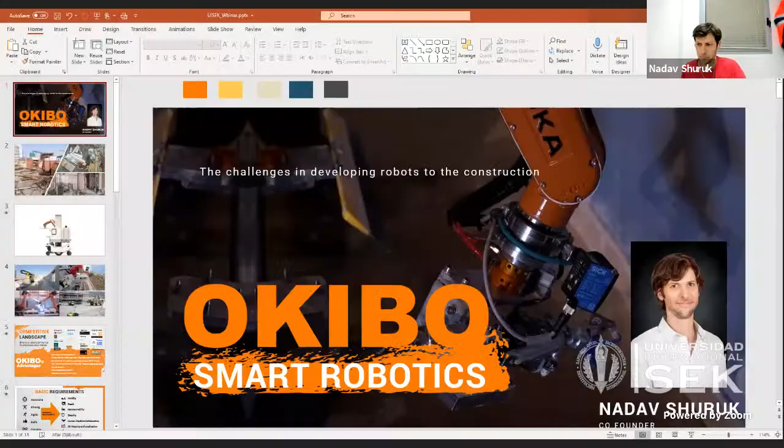Hi, I'll be talking today about some challenges of bringing robots, especially autonomous robots, to the construction industry. We founded OKIBO three years ago with very limited knowledge about this industry. We had some knowledge about robotics and autonomous robots, but combining those two industries together, we found out it's a big challenge, and I will be happy to share with you some of those challenges within the next 20 or 30 minutes that we have in this talk.

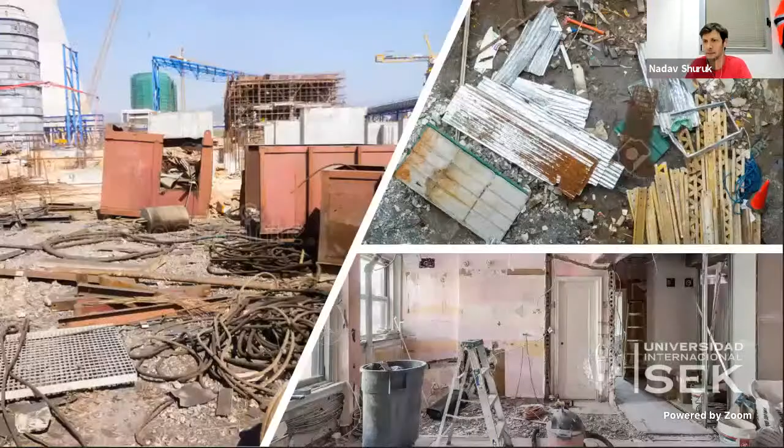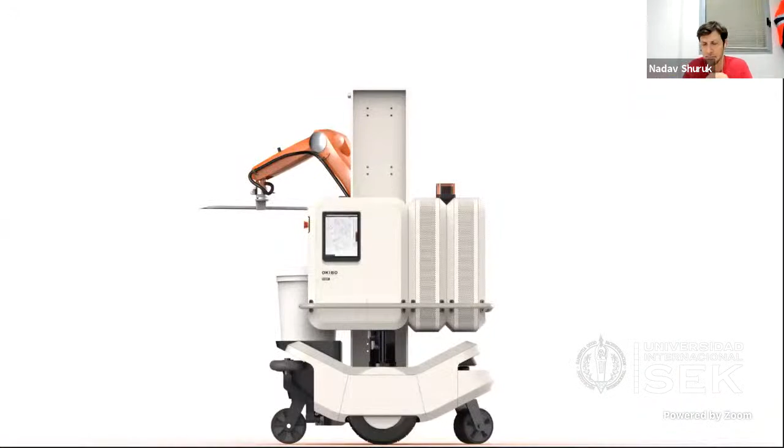I'm not sure how construction sites look like in Ecuador. I know how they look in Israel, something like this. You see a lot of mess and debris and all sorts of elements hanging around the site. In Europe, as far as I know, and in other areas, the site looks a little bit better, but overall it's not the nicest place to be. It has a lot of stuff all around. The question is, how do you bring very sophisticated equipment combined with computer vision, cameras, and all sorts of computers on top of it, something like this? How do you take this...

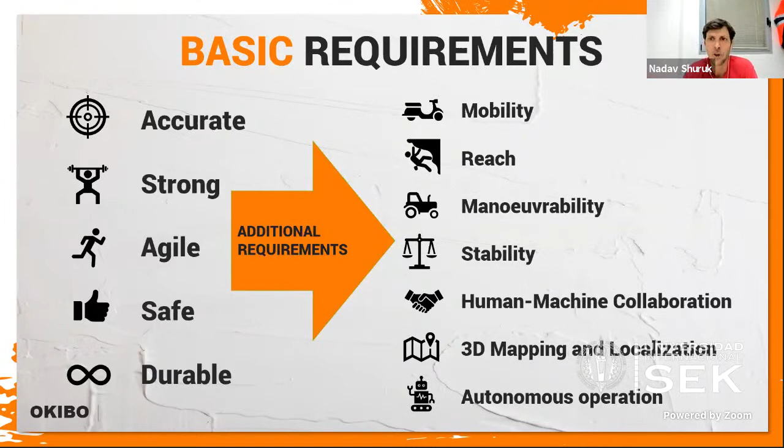So all in all, there are a lot of requirements, and some of them contradict one another. For example, if you need a robot to move around the site but also want it to reach large areas, you need the robot to be big. But if it's a big robot, you cannot transfer it around the site. So all those requirements, as I mentioned, can be very contradictory.

So, some applications that our company is dealing with—I'll try to combine what I presented earlier with what we're trying to do. OKIBO is developing a robot for applying wet materials as part of the finishing process. What we're doing basically is taking paint, plaster materials, primers—all materials used to cover internal walls when finishing construction—and applying them autonomously with the robot.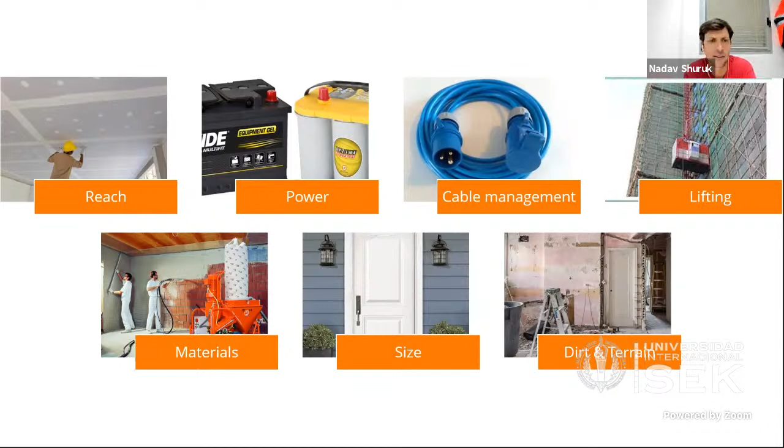And the last challenge that we're facing on a daily basis is of course the site itself, which is very dirty, and you have to have very high ground clearance of wheels and stronger motors and gears that will allow you to cross all sorts of obstacles, whether it's small slopes or stairs and so on.

This is something that has to be addressed well while designing and developing the solution. So what we did in OKIBO is we developed all sorts of technologies that we apply in our robot, and we divide it into three major pillars. The first pillar is the robotic platform itself, which needs to have all sorts of requirements.

Here you can see in this slide our fourth model called the EG number 5. It's a model that we ran last year in some job site testing. You can see on the top end there is the robotic manipulator standing on top of a linear axis. This axis lifts the manipulator, and this is what gives us the ability to move from floor to ceiling.

All the movement is synchronized, so we can keep constant velocity and constant distance from the wall, and in one motion actually cover a specific area in the wall.

As you can see here, this is the pump, and in this case, this is paint, the blue pump. The pump is mounted on top of the robot, and the material feeding is being done with buckets. So we take the bucket, we mix the paint, sometimes you need to dilute it a little bit with water and mix it, and then we just mount it on top of the robot into the pump, and we have the ability to spray the robot and to spray the wall.

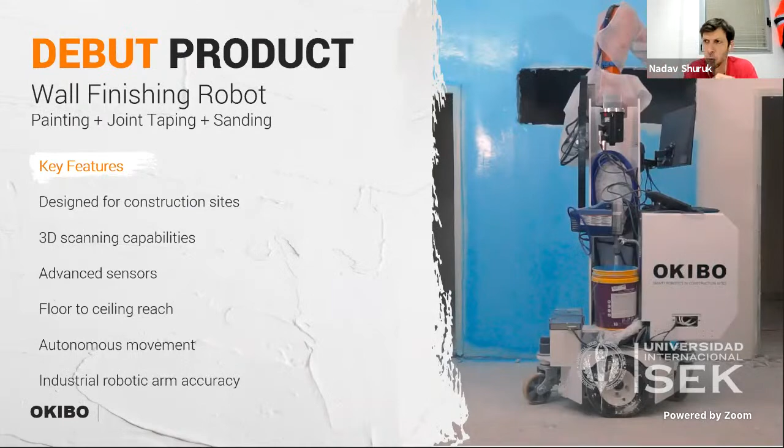The platform is connected at the end to a spraying gun, and with this we can operate it electronically, and we can spray the materials.

The second part of the core technology that we address, and this is not that difficult to present—it's behind the hood—is our ability to scan and provide a real-time image of what we see. At the beginning, if you remember, I described one of the challenges is to create a 3D model, 3D map of the construction site. So for us, it's mandatory. We have to have digital information of the room.

Not all construction sites have that digital information, even though this is something that is starting to get like a standard in several countries, like in the UK, for example. But in most of the construction sites, the digital information is not available, so we have to create our own digital map, and we have to create it in real time.

We cannot use 3D scanners or SLAM or other technology that is available, because each technology has its own limitation. 3D scanners are very slow to process. They just provide you with a point cloud, and then you need to process it for a long time, and they're not calculating all kinds of shadows and blockage that you have during the scanning. So it's not really effective for our use case.

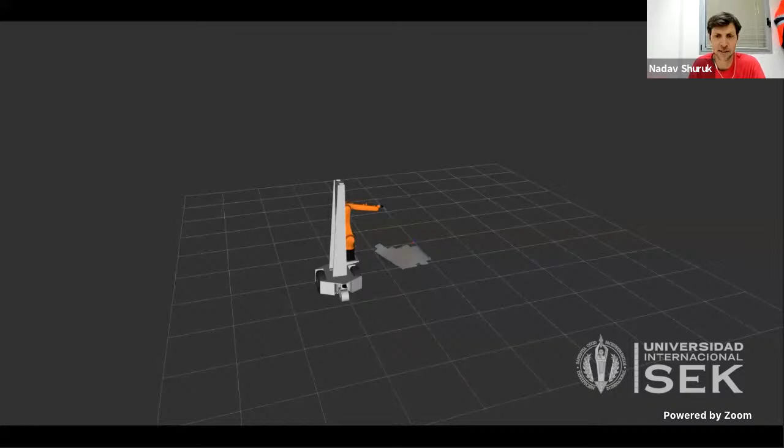So we had to develop some algorithms that provide real-time image. Luckily, we have a very strong algorithm team that developed an algorithm that enables us, as you can see in this short clip, with very affordable equipment.

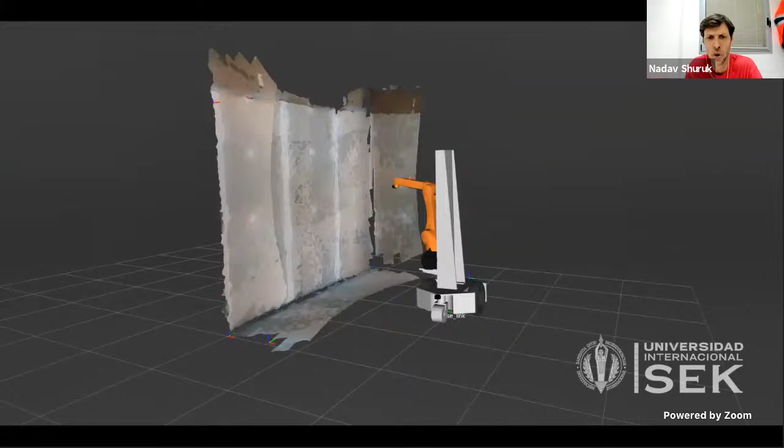For example, RealSense, Intel RealSense cameras, which are RGBD cameras, depth cameras, allow us to capture the walls. In this case, you see dry walls that already have some tapes on them and screws that are already covered. This was taken in our backyard, in the area that we built for some training. So you can see how the robot creates its own image.

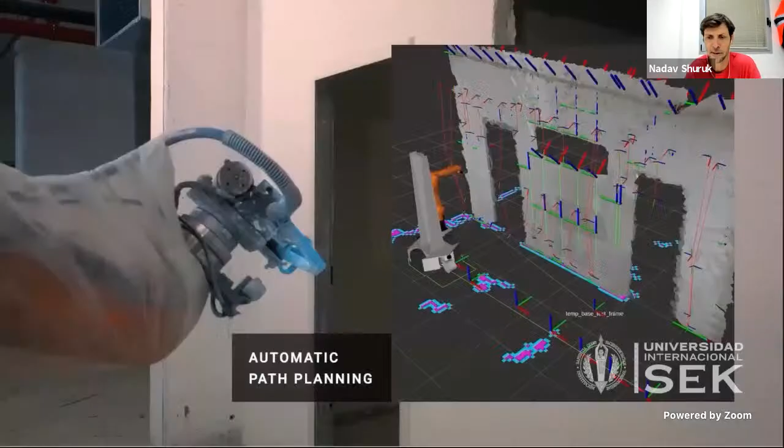And the third piece of software and technology that we develop is our ability to create an autonomous path planner. By creating an autonomous path planner, it means that the robot, once it creates the digital map at the previous stage, it plans its own movement.

So we don't program it. Our engineers are not programming the robot each time we see a wall or a room or a floor. The robot creates its own map, and after that, it creates its own movement profile.

So in this photo, for example, you can see on the floor the X's, which point to the locations the robot needs to be in order to perform the full coverage of the wall in front of it.

In this area, you can see that the robot identified that there are some doors and a window here, so those areas are not covered by the robotic motion. The green lines here stand for the movement of the robotic manipulator.

So the robot, once it creates its own 3D model, starts to operate, then moves to the second point, relocates itself in this area, and continues the movement. Once it covers the next area, it continues to the next, and so on until it finishes the complete work.

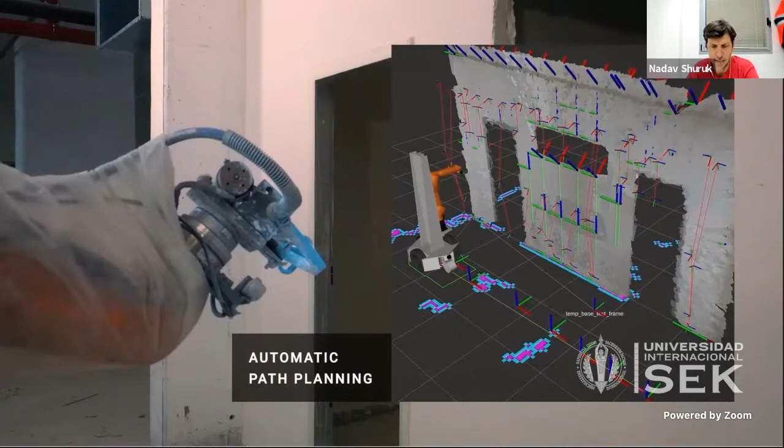Let me show you a video that demonstrates this. It demonstrates the technology and the application of paint, in this case, in a construction site in Israel that we did last year with the previous model.

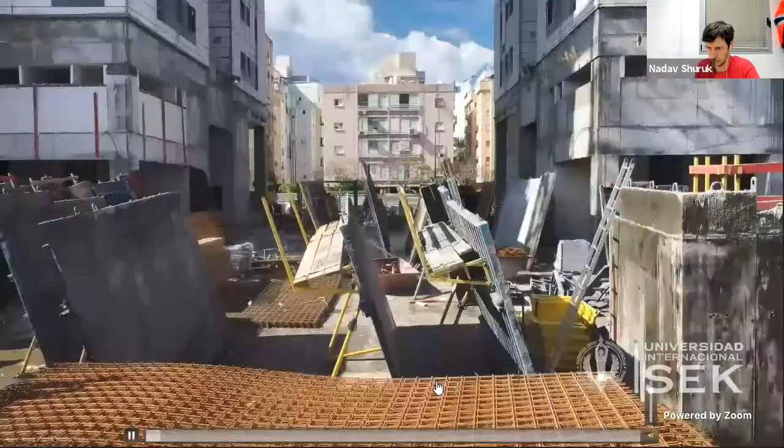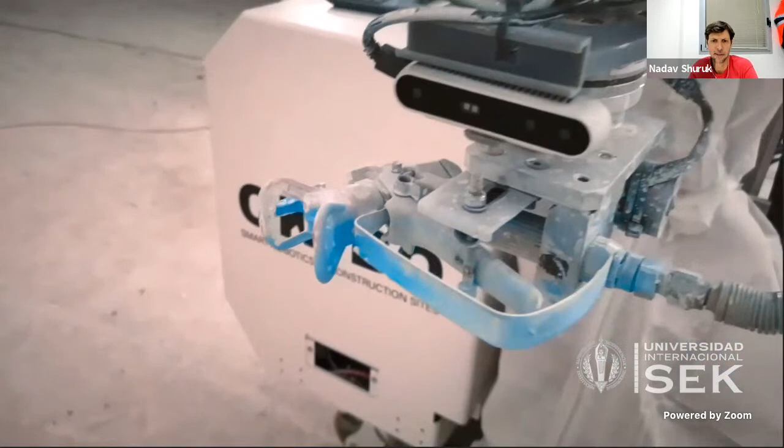Okay, so here you can see the robot. Here you can see, for example, the camera and the spraying gun. This is the part when the robot creates its own 3D image.

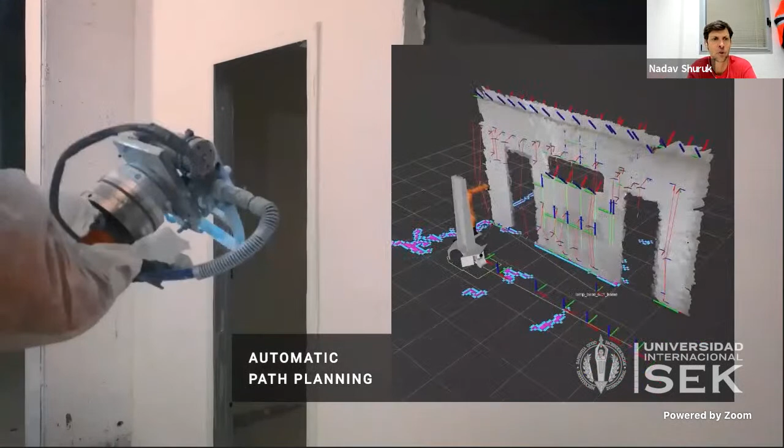We have the ability to compare the image that we provide to the images of the site, and if there are some mismatches, we can direct the project manager. In this case, you can see that the robot identifies the doors and windows and does not paint them.

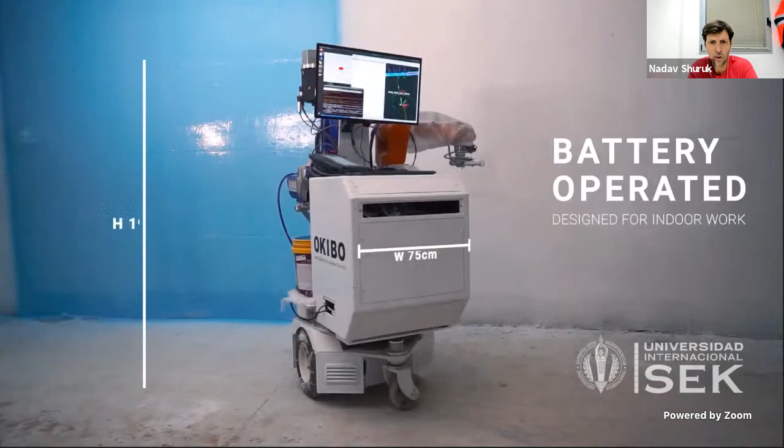The robot, as you can see, is battery operated, no cords, no pumps, nothing dragged after the robot. And here you can see the robot moves from one wall to the other.

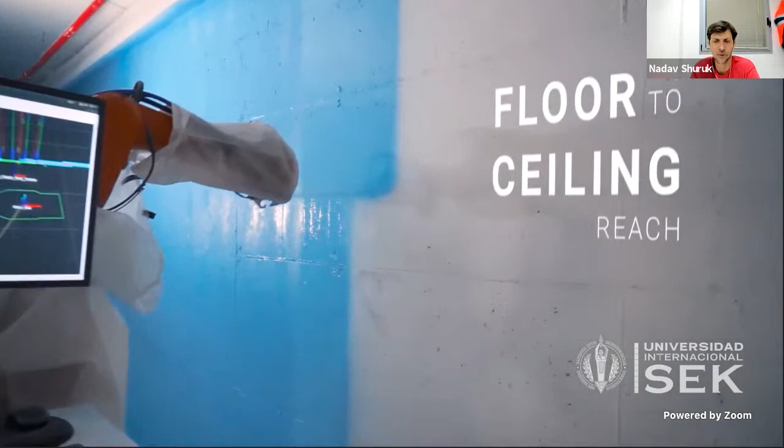Of course it's in fast forward, but the robot moves and performs very accurate wall covering from floor to ceiling in a very synchronized manner, as I described earlier. Once you finish the area, it can be transferred by the operator to the next working area.

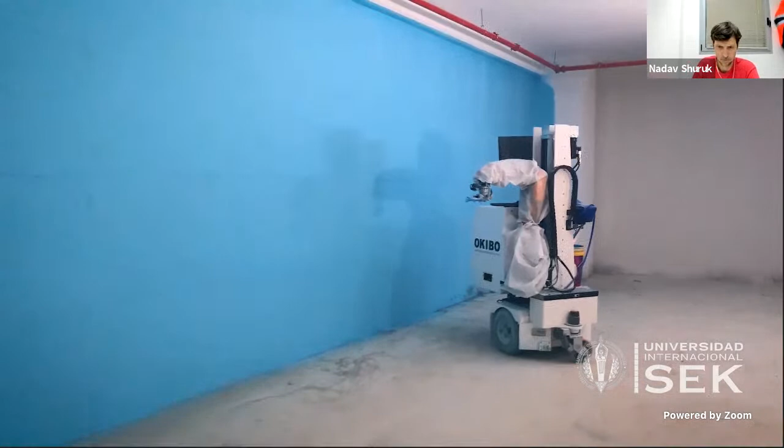Yeah, so this is basically, in a nutshell, what we've done, and the difficulties and challenges of bringing robots to the construction industry.

OKIBO is still in a very advanced R&D process, and we're only now about to test our first units in job sites outside of Israel. We have some construction companies hosting us in Germany next month for some trials, and following those trials we'll be able to finalize the development and bring the product to market.

And I'll be happy to address your questions and let you know what we're doing in the next steps.